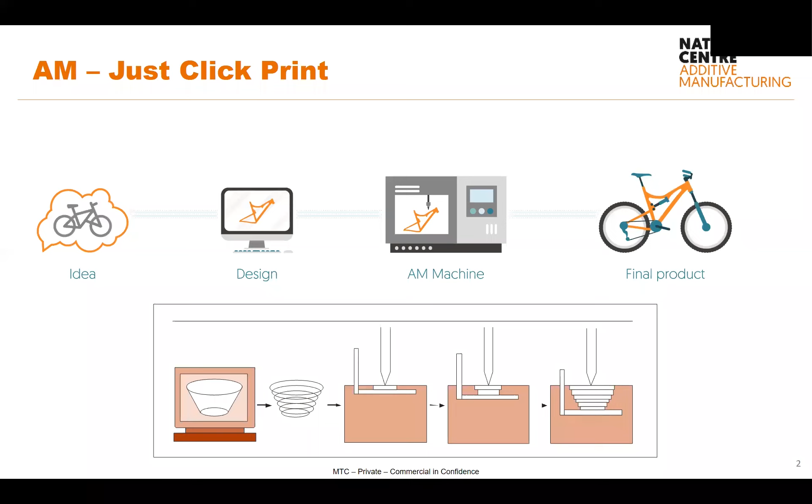So what additive manufacturing actually involves is an awful lot of steps in order to get the part right. Because we're designing parts with very complex features, we're going to need a very robust inspection plan. The harder the design, the more difficult it's going to be to inspect and validate. The part does not come out finished.

When we have a part post-AM, there's a lot of machining steps required. We've got to recover our material, remove support structures, and finish it. So there is some level of machining to do after AM. We also have to identify the appropriate melt strategies to melt the material properly and get a good microstructure free of defects. There's a lot we have to do up front around the design—it's not just the design of the part itself, but also the support structures that need to go around it.

Unfortunately, powder beds are very poor conductors, so heat builds up in the part. If we want to get rid of that heat, we need to have a sensible amount of support structure around it to take the heat away from the part, but also to appropriately anchor it. So there's a lot of considerations that need to be made at the design stage.

And then, of course, as the topic of this is powder, there are lots of considerations that we need to make when it comes to powder. You'll see a lot of these steps involve something that we have to do with our powder material. Obviously, the scope of this webinar won't cover all of this, but fortunately, over the next few weeks, MTC and the AMTC are putting on a number of webinars which will cover the whole process chain of the additive manufacturing process. Today, we're going to focus just on these powder handling steps.

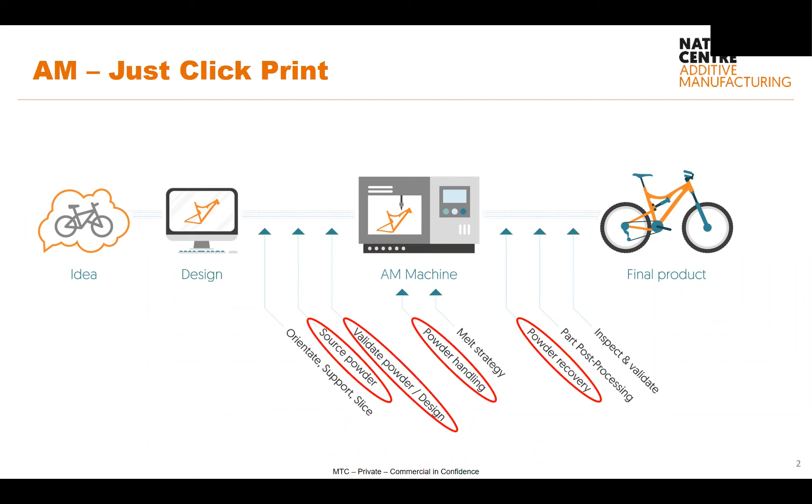So why should we care about powder in the first place? Commercially, if you think about the powder itself, we're buying an atomized material, which in itself is more expensive than buying billet material. So the material itself is very expensive. When you run the numbers on this, it can, in some scenarios, make up a third of the overall production cost just simply buying your powdered material.

Now, additive manufacturing is often billed as a material sparing technique. What that means is that we only use the material that we need in order to build our part. If you look at things like subtractive manufacturing, we can lose 20 times more material than we make into parts—a buy-to-fly ratio of 20 to 1. In AM, because we're building parts much closer to net shape, we can use a lot less material. But when you think about what additive is doing, you're spreading an entire chamber full of powder and only making a small amount of that volume into actual parts. So the ratio of powder used to part built can be just as bad as subtractive manufacturing.

So in order to hit that material sparing criteria, in order to make the business case work for AM, we have to be able to reuse the material. But every time we use it, how is the powder changing? Is it still suitable for the process? Is it still applicable to use in my next process, or do I need to throw it away? We've got to be able to understand that.

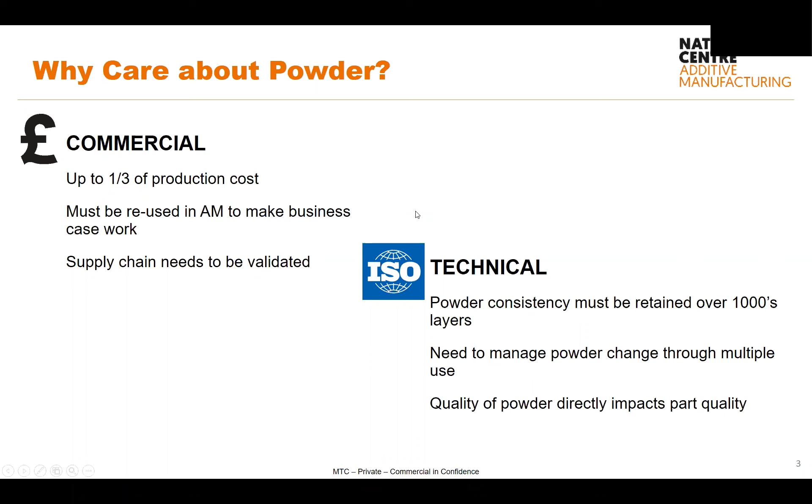Some of the things we need to be concerned about are things like contamination. Contamination is really hard to control. If we're getting bits of our machinery, for instance parts of the steel surface breaking up and coming into the material, that's going to contaminate it. If we have other materials that we're handling in the area and they cross-contaminate, that's going to contaminate our powder. That might not be suitable to reuse in process. We've got to worry about contamination.

Process incompatibilities - if the material's not appropriate for your machine or your part, you're not going to get a good process and a good part at the end of it. Health and safety, obviously, is a huge risk and something we absolutely need to be getting right. Powder part ratio, like I said, can be as bad as, if not worse than, subtractive manufacturing if we're not able to recycle powder. So we've got to make sure we know how we can do that well.

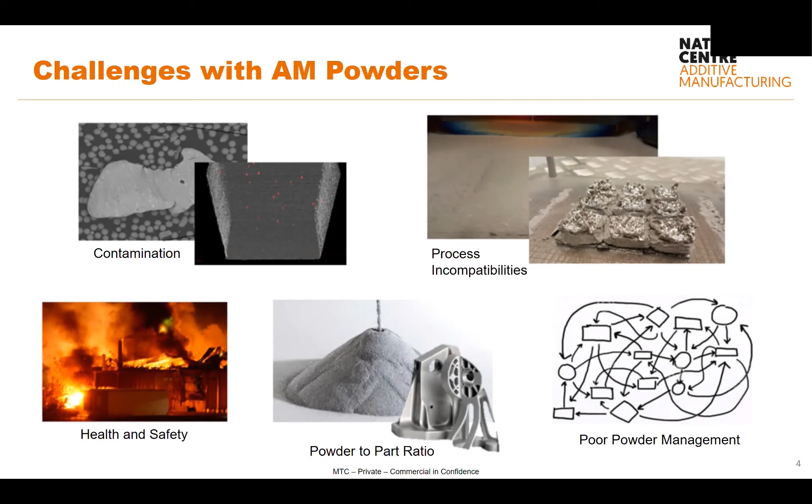And then the other thing is poor powder management. If we don't know the history of our material, then we really shouldn't be using it, because we don't know if it's still good for use, if it's been handled the right way, if it's been exposed to unfavorable conditions that might have degraded it further. If we don't know the history of this powder, that can get very complicated. If you've got a powder that's been recycled over 50 times, and multiple powders like that on site, it can get very complicated how you manage that material. And if you don't have that history, then you don't have a process. So there's lots of challenges when it comes to AM powders.

So maybe just to drive this home, if we look at a very basic overview of any process we're running, our parts are obviously going to be inherent of the material we put in and the way in which we run the process. So if we don't really know what we're putting into the machine in terms of the powder, and we run in a fixed process window, then we can't really hope to control the quality of our properties - it's going to be variable, it's going to be unknown. So what we need is a position where we have a powder which complies with an adequate powder specification. Then, when we know our powder conforms to that specification, we can run our fixed process window, and fix component properties within a tolerance.

So there's a lot of questions we need to start asking ourselves about this input material. Firstly, as I've said a few times, if I put rubbish in there, I'm going to get rubbish out. If my powder is not compatible with the process, it's not going to work. So the first thing I need to know is: how does my powder properties influence the AM process? What does a good powder for my process look like? I then need to worry about batch to batch - am I getting the same material every time I order a batch from my supplier?

And should I ever need to switch suppliers, do I understand the level of variability between one supplier to another? Do I have a good handle on that? Because I'm reusing my powder, I need to understand how the AM process affects it. Am I going to pick up oxygen, interstitial oxygen, for instance? Am I going to pick up contamination? Is my particle size going to change?

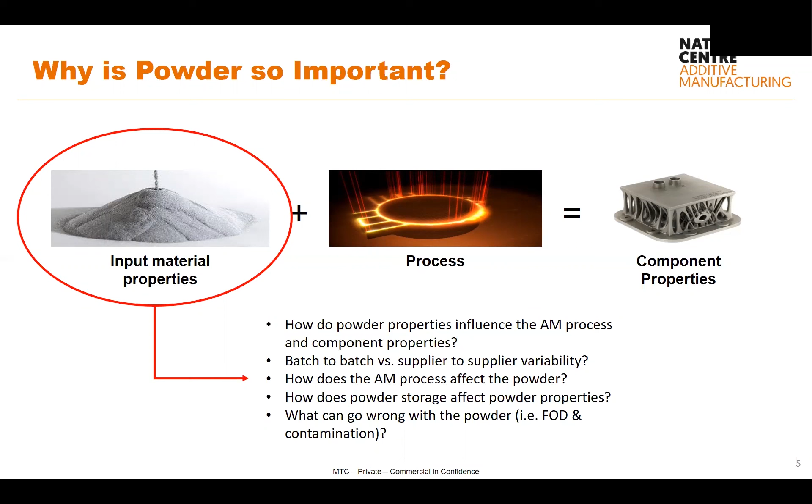And then, what can go wrong with it? FOD, so foreign object debris or contamination. What are the things that can happen to the powder whilst it's on site that are going to degrade or detract from the quality of that? And of course, in order to answer these questions appropriately, we need a robust powder management process.

So what is powder management? Effectively, we see powder management as being a framework to enable full material traceability and quality control of powder feedstocks and manufactured components. And so a good powder management process should enable us to answer these three fundamental questions.

What has happened to my powder? Where's it been? How many times has it been used? What machines has it been used in? What processes has it gone through? Has anything happened to it that may lead me to believe it's no longer in specification? Like, was it used in a machine where the oxygen content raised above a threshold, and therefore I might have some high levels of oxygen in my powder?

I want to know what's happened to my component. So the component I've made, what the powder that was used to make it, like what's the history of that, and then what's happened to my equipment. When I've used the sieving equipment, for instance, has the sieve screen broke? And I might find that out by doing a quality control check on my powders, and I can say, oh, something's happened with my equipment. I need to have a look at that.

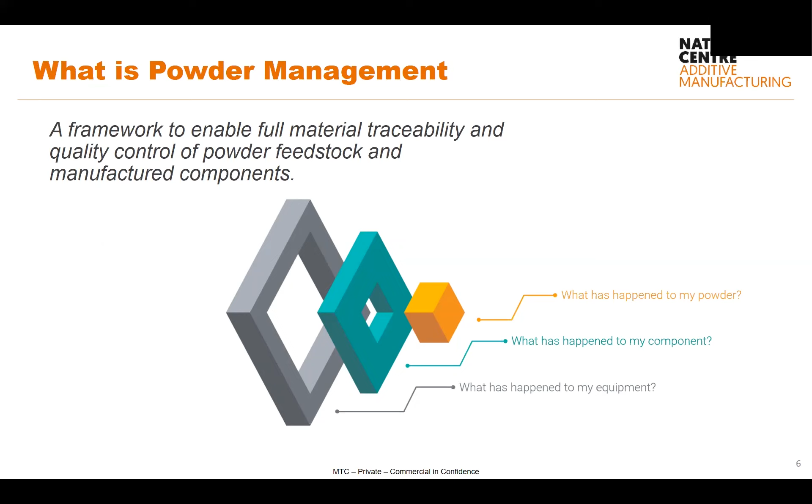And so why implement powder management? I believe it would be clear to everyone right now why we should be implementing powder management, but just maybe to drive it home, really, there's a term that's used in the aerospace industry, ALARP, as low as reasonably practicable.

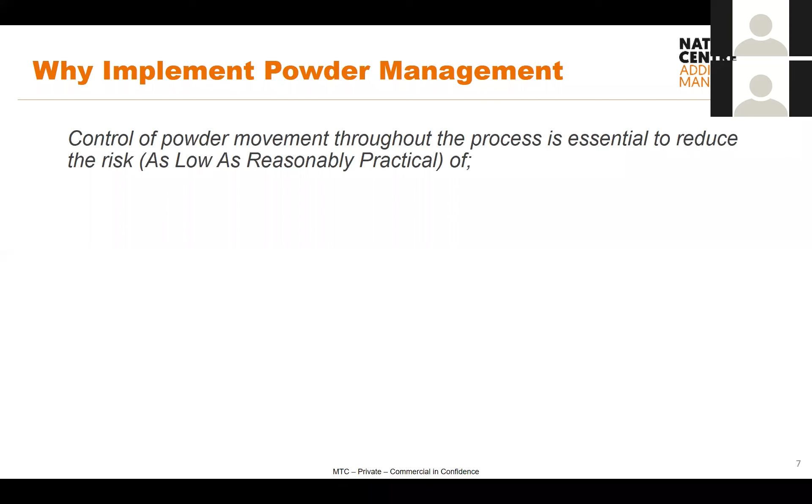Where a powder supplier was contacted by someone they've sent material to, and this user of the powder has lodged a complaint: your material that you've sent us is contaminated. Now, when they did a failure investigation to understand what happened, actually there was nothing wrong with the powder supplied by the supplier. The issue was actually with the user, because they weren't using dedicated machines, as in, they weren't using a machine dedicated to a material type.

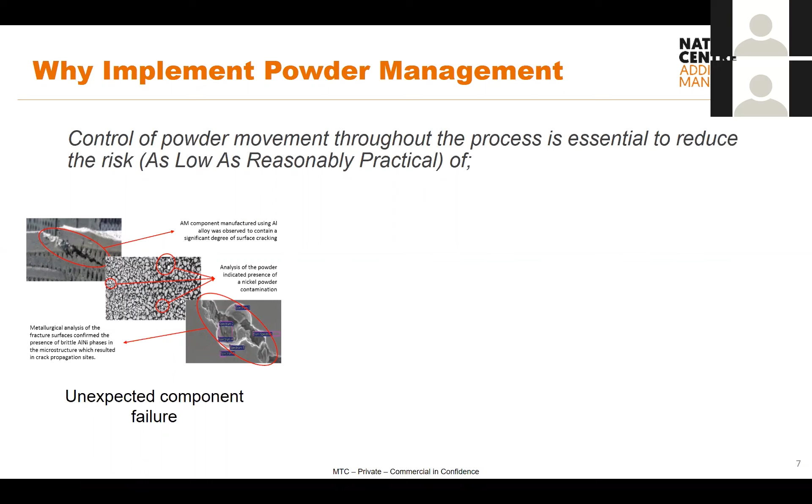They were switching materials from build to build. And what actually happened was the previous time they used that machine, they hadn't cleaned it out properly. And so when they put this new material into it, it became contaminated with the previous material. And so they ended up with some unexpected component failure. And that's really important that we've got to be able to minimize that as much as possible.

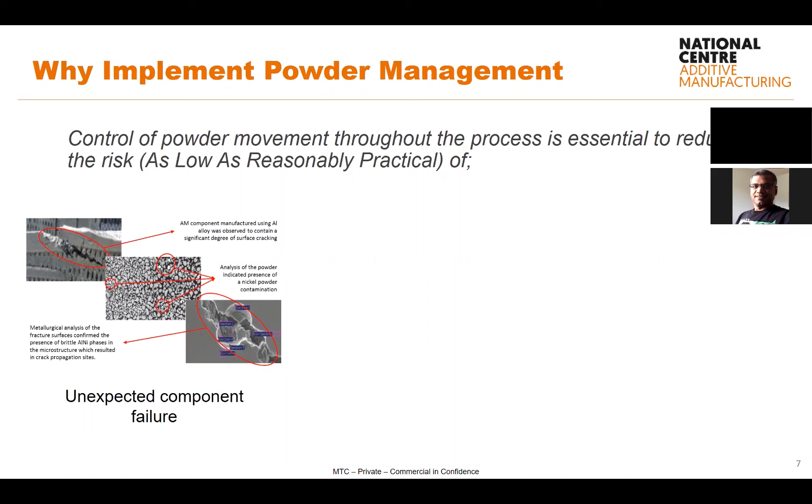The other one, it happens. Human operators at the end of the day run these machines. Material misidentification. It's about understanding, making sure or minimizing the risk as low as reasonably practical of putting the wrong material into the wrong machine or the wrong process.

And then the other one is this concept of lack of traceability. As long as I have good document processes and I keep track of what I'm doing with my powder, I can be reasonably confident that I have a good level of traceability of that material, and I know how it's been used and what might have gone wrong with it.

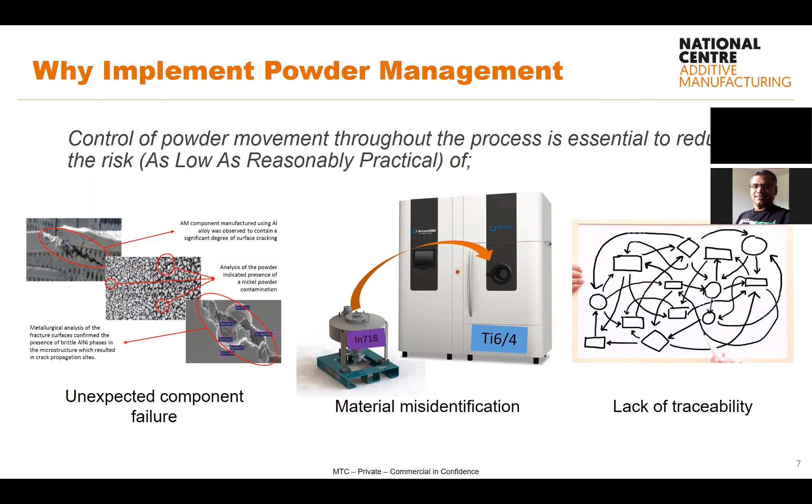And so what the powder management cycle looks like. This is what we implement at the MTC. And again, with the time that we have available, there's not enough time to go through all of this. But step by step, we need to validate our material.

We need to receipt the powder. Now this is very basic, powder receipting, but it's so important. It wouldn't be the first time that we've ordered material from a supplier and that material has been the wrong material, for instance, that's happened to us before. It might have the right labeling, but the wrong material inside the container.

It might arrive in a damaged container. If the container is damaged, how do I know the powder inside is going to be good? For instance, it may have been exposed to elevated humidity and temperature, and therefore the powder inside may have degraded.

So powder receipting becomes very important. Did I get what I ordered? Did I get it in good condition? And did I get the amount that I ordered it in? Quality assurance, again, is so important.

But the reason quality assurance becomes so important, it's not just about when I first order the powder and first receive it, it's about when I use it afterwards. The powder supplier only needs to get it right once, but as an end user of AM powders, I need to be able to get it right 10, 20, 50 times, however many times I'm going to use it.

Powder storage and segregation, again, it's about reducing that risk as low as possible, having dedicated areas for certain material types, having the appropriate storage conditions, whether that's humidity and temperature controlled, whether that's ambient conditions.

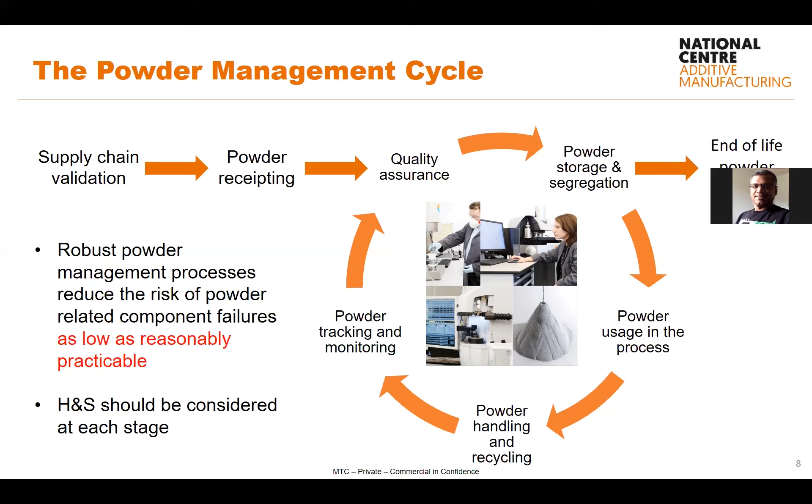So supply chain validation. Now, one of the things I always like to preach about AM powders and the supply chain is that the powders come in many shapes and sizes, depending on the process used to make the powder. And in most cases, even if the same process is used, depending on the supplier of that powder, I will get either very or subtly different powder properties.

And that's going to affect things like bulk packing, flow properties, and effectively the way it works in the process. Now, there's not enough time to talk about all the different atomization processes here, but it's really important that you understand what is the right atomization process for my material.

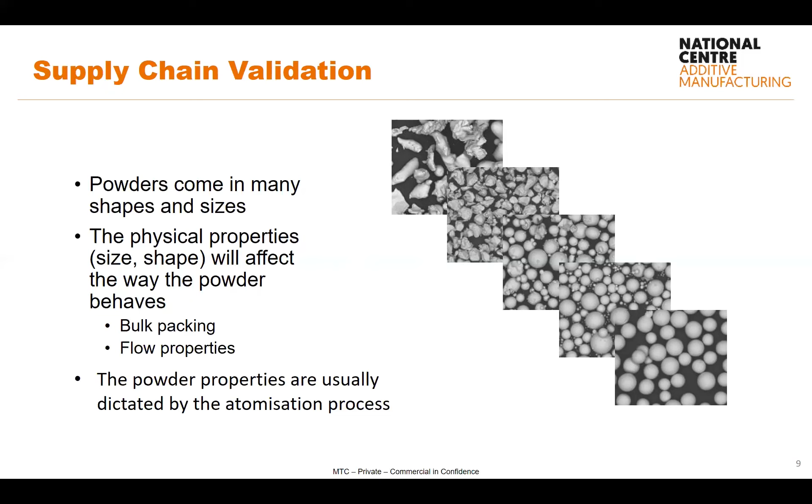So some of the very pertinent things you need to consider: am I using a nickel superalloy, for instance? If I am, I probably want a powder that's been atomized via argon rather than nitrogen. If I'm using titanium, I probably want to go to a supplier that uses EIGA, electrode induction gas atomization, rather than a supplier that's going to use a crucible.

So there's lots of things that we need to consider. We need to understand the supply chain and how it affects our material.

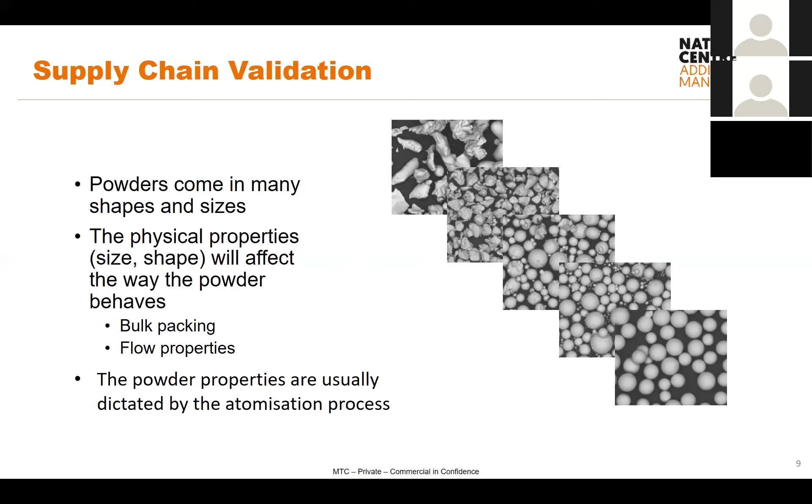Now, when we look at the actual AM process, how is powder handled in the process? Well, there are 4 things during the actual process that we need our powder to do. So the first one is storage. Clearly, at some stage, we need to put powder into a machine. And of course, anyone that's run an AM process will know they're not exactly fast. It could take days, 3 to 5 days to complete a build from start to finish.

So during that time, we need to make sure that powder is stable. We need to make sure there's enough of it to start with. So is the bulk density sufficient that we can pack enough material into this hopper to get through the whole build? Is there going to be any change, like particle size distribution? Is there going to be any segregation in that hopper during that time?

Is there going to be any time consolidation, which may mean that whilst I get good dosing to start with, it degrades over those 5 days? There's a lot of things that we need to consider effectively.

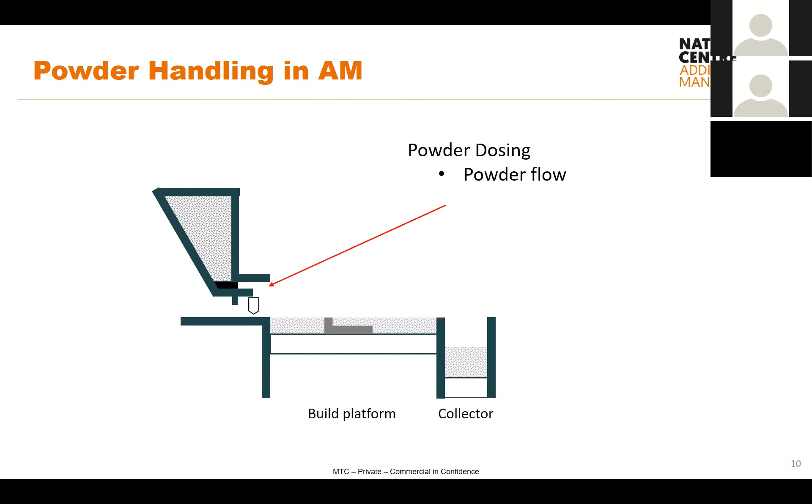At some stage from that storage, we need to dose our powder into our machine. We need that to be consistent every time, dosing the right amount, with a consistent particle size distribution and no segregation. And it has to be equal across the face of our spreading device. So very different behavior to static now; we need to go from this static condition in a hopper into a flow condition.

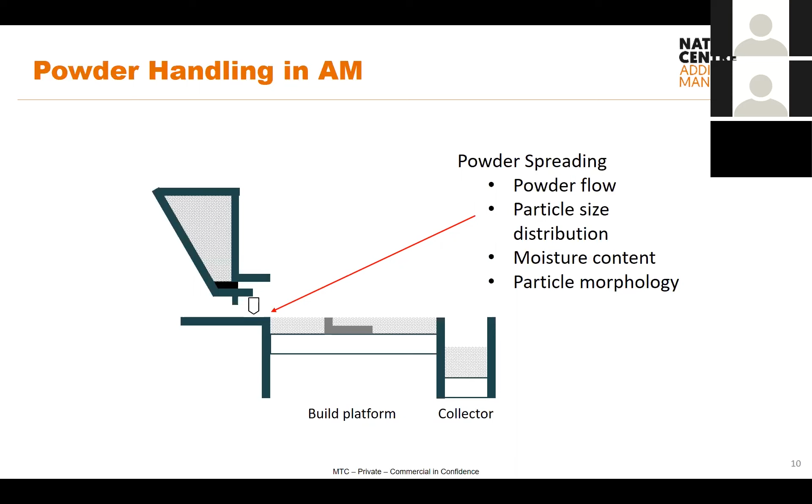At some stage, after we've dosed it, we need to spread it across the bed. Again, flow becomes really important, size distribution important, morphology starts to have an effect on things like flow. Effectively what we're trying to do is have a very even coating of powder across this build platform, and we need to do that every time, thousands of times. So again, very different behavior that we need from our powder compared to dosing or storing it in a hopper. And then eventually we want to melt that into a part.

And that's where things like chemistry are going to become important. Is the chemistry correct? Is it clean? What I mean by clean is it free of interstitial contamination, such as oxygen, for instance, or at least within the right spec, or is it free of foreign particulates?

And then we might be worried about porosity. Is there porosity within the particle that when it melts might cause issues? And again, bulk density. So when I've spread it, have I got a consistent bulk density? Is it dense enough that I get good stability of the part and I don't get too much shrinkage when it melts, for example? So lots and lots of different things that we want our powder to do.

And this is just inside the machine. This is before we even consider how we get the powder into the machine and out of it, and all of the equipment we have to handle it through in order to recycle it. So we demand a lot of the powder in terms of performance.

And if at any stage this goes wrong, it could be as simple as my powder doesn't dose. And that happens. I've seen many examples where we've put a powder into a machine and it doesn't dose. In that case, that's in effect a catastrophic failure, right? The machine just isn't going to be able to build.

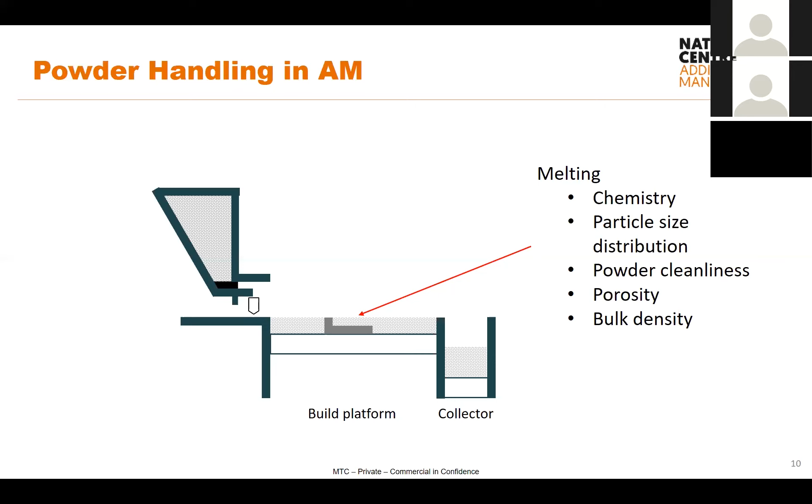And these are things that happen. So we've got to make sure that we understand how our powder, what powder we need in order to do all of these things efficiently. And so how do we do that? Well, unfortunately, powders are quite complex, and there are a lot of things that we need to measure.

So we tend to talk about four levels. So you've got our particulate properties. This is things like particle size and its distribution, particle shape, internal porosity, and of course the metallurgy.

Then those particles obviously are going to form an assembly, a bulk. So then we're worried about how those behave in that assembly. So packing becomes important. How do they pack under a loosely poured condition? How do they pack under a tapped, stress-induced condition? How do they flow? How do they flow out of hoppers? How do they flow in the spreading device, for instance? These are all things we start to worry about.

Then, of course, there's the chemistry. I always like to say, no matter how good a material flows or how good the morphology is, we're never going to choose a material unless it has the right chemistry. So that's fundamentally the most important thing. Is the chemistry correct in terms of its alloy composition, but also in terms of the interstitial elements like oxygen and nitrogen that obviously will have an effect on mechanical properties.

And then there's cleanliness, which is a lot harder to identify. There are no standardized techniques for this, but it's important nonetheless to understand, is our material clean, or is there something in there which, if it forms the final part, is going to be detrimental?

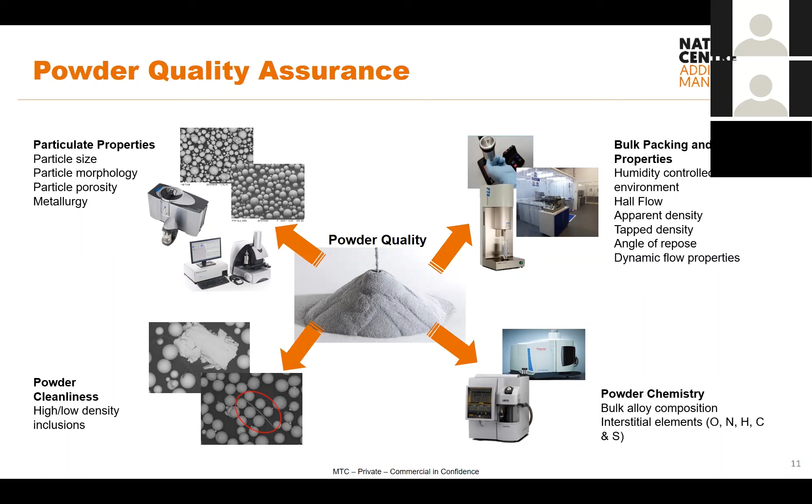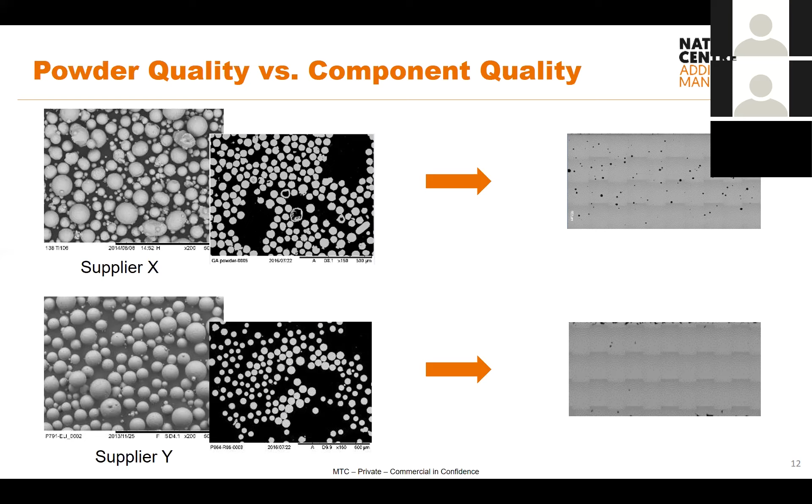So on to powder reuse then. Why is this so important? In the process, there are several things that we want to be concerned about.

The first one is a phenomenon known as spatter, weld spatter. I already mentioned that powder beds themselves are very poor conductors of heat. So what this means is that when we melt the powder particles during the process, because we're not releasing that heat from the melt pool, the melt pool can exceed the boiling point of the material. And if that happens, we get particles ejected from this melt pool - you can see them, they look like mini firework displays if you ever watch an SLM, a laser melting process in operation. Of course, what these particles are, they're molten, so they're very, very hot. So any residual oxygen in that container, those particles are going to pick them up.

But also, in a similar way to the atomization process, those molten droplets, if they come in contact with anything such as a surface or other metallic particles, they're going to have deformed geometries when they freeze, when they reharden. And if those are too small to be taken out by the sieve, then those irregular particles will then be present in your powder after you've recycled it. So you're going to have potentially bad morphology and locally high oxygen content in these particles - that's bad news for your recycled material.

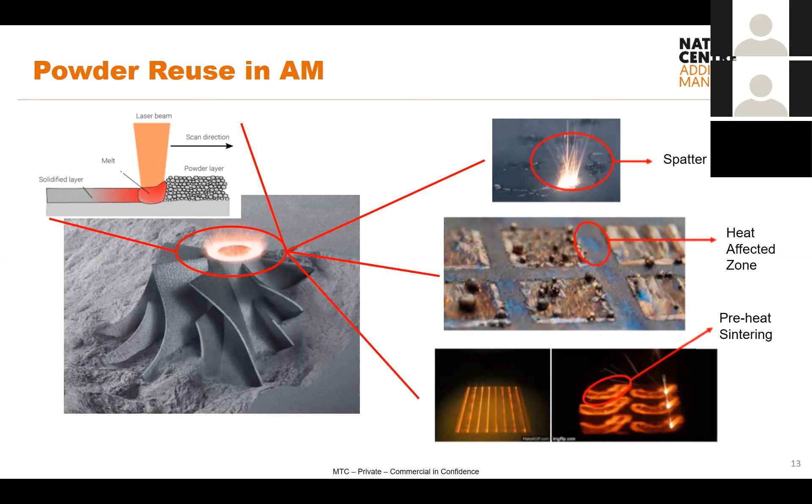Now, the third one - and if you're not familiar with electron beam melting as a technique, you won't have come across this - is preheat sintering. In electron beam melting, for all sorts of reasons, we have to pre-sinter the material in order to avoid something called the smoke, effectively where charge builds up in your particles and they basically repel one another, and you get a big puff of smoke, of powder particles flying up into the air.

Down the system, it's bad news, so you have to sinter. But of course, sintering is a soft melting - you're not fully melting the particles, but heating them up sufficiently that they form necks and sinter with adjacent particles. Because the sinter area in EBM tends to be quite large relative to the part, coming back to that whole process economics, you've got to be able to reuse that pre-heat sintered powder. So you break it down as part of the recovery process back into its individual powder particles, which then get put back into the machine.

Now, again, because you pre-sintered, there's a chance of raised temperature, therefore higher oxygen content in the particles locally, and potentially a morphology distortion - so you're degrading the morphology of your particles. These very nice spherical particles are no longer as spherical. Is that going to affect the way they flow and pack in further builds?

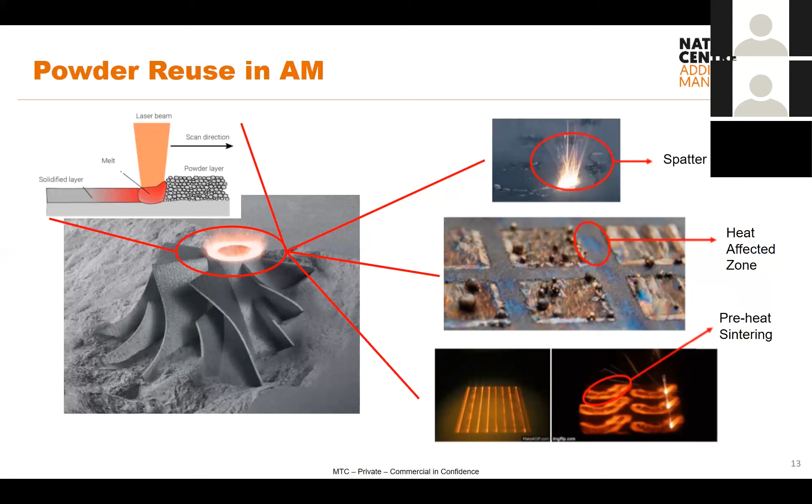So when we look at powder degradation, some of the things I think we need to be most concerned about - there's two of them. The first one is interstitial contamination.

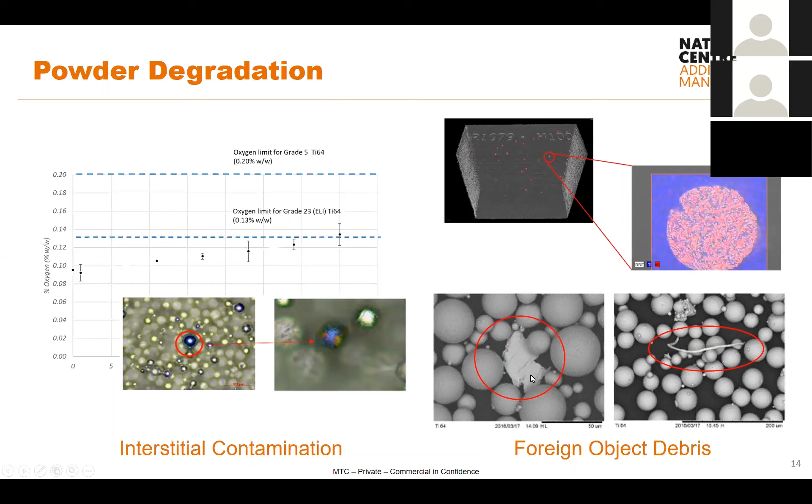So how do we do powder recycling then, and what are the challenges of that? We've got a machine, and at the end of a build, we're going to have some remaining powder in our hopper that we loaded to start with. We're going to have the unmelted powder in the build platform, and then depending on what machine we're using, we're probably going to have some overflow container which has powder in it as well. We need to be able to recover powder from all of these places.

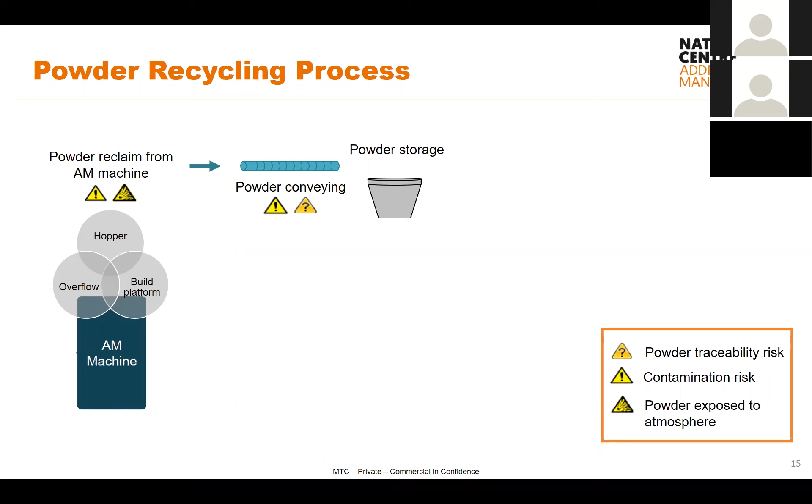The first thing we're going to do is convey the material from the process, from all three separate areas of the machine. We're going to put it into storage, then convey it to a sieve where, again depending on the process we're running, we might have a single sieve deck and only cut out the oversize, or we might have a double sieve deck where we cut out both the oversize and undersize, and keep the bit in the middle.

Then at some stage, we're going to bring that back to storage. We might take a sample at that point to do some quality assurance testing, and then we're going to load it back into the machine.

Now, again, this is a bit divisive in the industry, so I've not included it in this graphic. We may also blend the powder at some stage, just to homogenize it and mix in some new material. But the point is, at each of these stages, if I'm not careful, I have the ability to contaminate the material. I have the ability to expose my powder to atmosphere, and I have a risk to traceability.

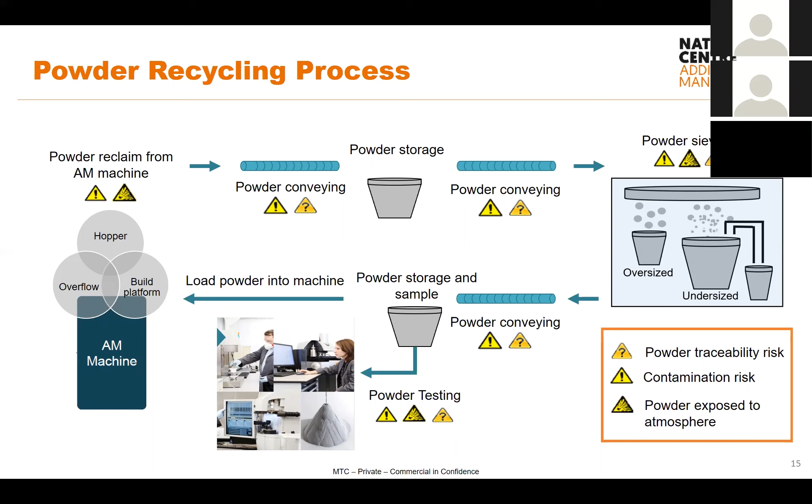So I need to be able to manage all of these. Now, the equipment that we use in recycling - there's lots of hoppers, obviously. There's a hopper in the machine itself, and usually when I decant from machines or from one process to another, I'm going to put it into a hopper. We've already talked about the potential issues with flow there. So the challenge with the equipment is, will I get good flow of material out of those hoppers?

I obviously need sieves. Again, lots of challenges with sieves. Am I going to blind my sieve? If my sieves are likely to blind, what can I do about that? What kind of sieving technology do I need in order to get the most appropriate sieving?

At some stage I might need blending units. Again, blending is a whole science in its own right. Worst case scenario is you may as well have not blended in the first place, because actually by blending inappropriately, you can segregate particles. So you might end up with a really particle-size-segregated material.

Think about your cornflake box. When you've got your fines, they all sift to the bottom and large sits on the top. So if I blend inappropriately, I could cause that to happen. How is that then going to affect future uses of this material?

And then with some of the newer machines that are coming available, there's actually a lot of pneumatic conveying. What's that going to do to my material? Is that going to degrade my material? Is it going to cause any breakdown of the material itself? Unlikely, because it's hard metal powders, but there's a good chance I could cause breakdown of the transfer lines, and therefore degrade my material by putting in contamination.

So there's lots of equipment that we use. And again, we need to understand what is the right equipment for my process and for my powder. So it's not just as simple as, I want that one.

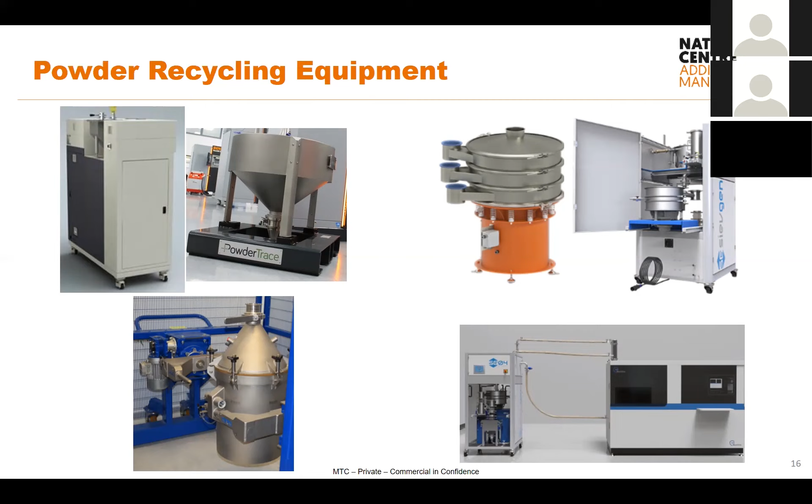So powder storage - at some stage you're going to have to store it. And I guess what we're interested in here is, what is the way to store material? So I might want to worry about the actual gas that's in contact with the powder. I obviously put my powder in a container - what's the gas around it? Does it need to be inert? Is it okay to just be ambient? Do I need to add desiccants to try and remove moisture from the immediate area? So again, this is the internal environment that the powder is stored in.

Then there's the container itself. Is it okay to use plastic jars, which a lot of powder suppliers use, or do I need metal? What's the right container for my material? And then there's the external environment in which we store that container. Is it okay under ambient conditions, or does it need high level control, such as humidity, temperature control, or even one step further, inert gas control? These are the questions that we need to understand.

And again, there's not a one size fits all. It fundamentally depends on the material that you're using and the level of criticality of the part you're trying to build.

There's not a one size fits all here. The most important thing is it has to be cost effective — the minimum requirement to maintain powder quality whilst costing the least amount of money. It's not appropriate to apply the highest level of control over storage in every situation, because at some stage it just might be cost prohibitive. So again, we've got to understand the right way to store our material.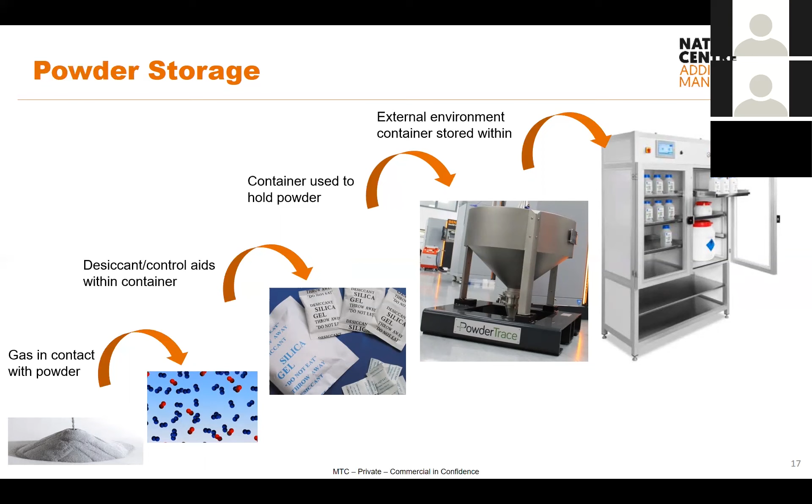So the last thing I want to cover is a bit on health and safety. Health and safety is a bit of a minefield when it comes to metal powders, simply because there probably isn't enough data working with them. I just want to give you a real example, which you can read up on the internet.

It comes from the medical sector. An employee was using a vacuum to clean up a spillage of titanium powder. The vacuum this employee was using was inappropriate for the job — it wasn't grounded properly, and therefore it was able to build up static charge. That static charge was enough to ignite a dust cloud of titanium 6-4, which led to severe injury of the operator in question.

In this scenario you could say they were lucky — one person getting injured is clearly not ideal. But when it comes to explosions like that, sometimes it's not the primary explosion that's the worst thing, it's often the secondary explosion. If you get one explosion and there's any dust around your facility that hasn't been cleaned well, that can get de-settled and cause a secondary explosion, which can be much worse because there can be a lot of it.

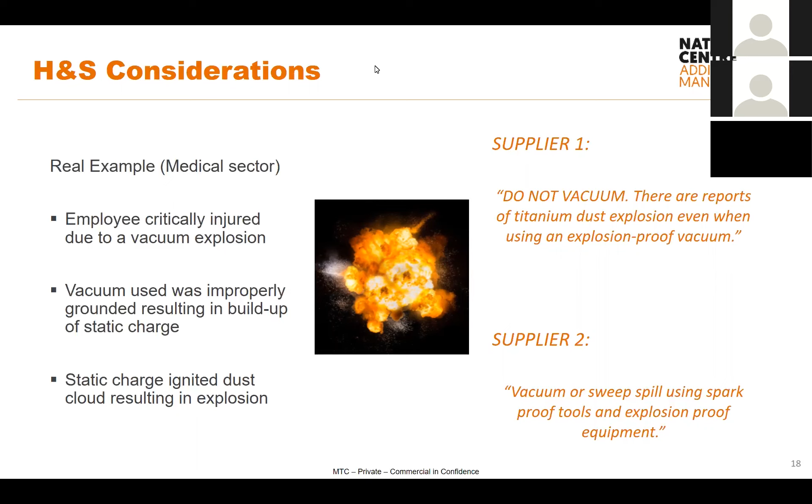So something we did at the MTC — I'll go over this case study quickly now. We worked with the Health and Safety Executive, part of the Health and Safety Laboratory, and we looked across a number of different AM processing sites to assess the level of exposure our employees face. Explosivity is one issue, but another is that a lot of the materials we work with, such as nickel, are potentially carcinogenic, so we've got to protect our operatives.

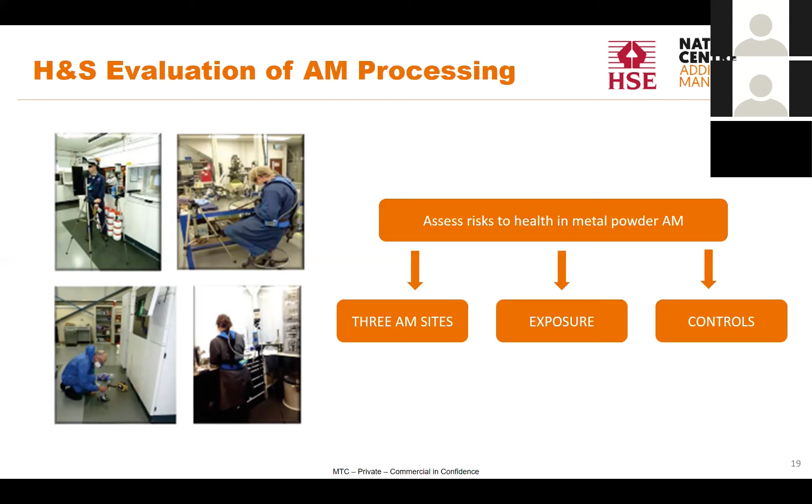The HSE came into these three sites and we put various testing equipment around the lab — sticky tabs at different locations for different activities. The operatives had personal monitors close to their mouth and close to where their respiratory equipment would pull air from if they were wearing belts, so we could get an indication of particle exposure at those locations. We also did personal monitoring, testing the operatives' urine to see if they had elevated levels of materials used in AM. These are the results for the three sites.

Now the good news story: at none of the sites was there a higher level of occupational exposure than specified in the MSDSs — no operative was exposed to a level of material higher than it should be. But what we did find was that the level of airborne particles depends on the task the operative is carrying out.

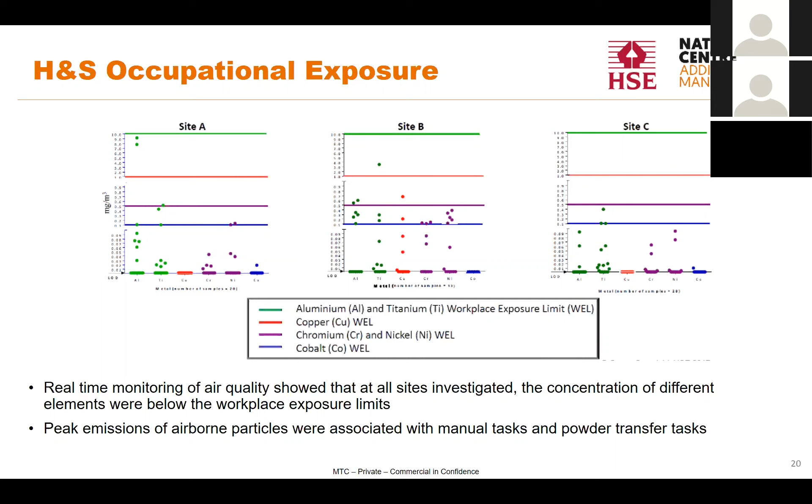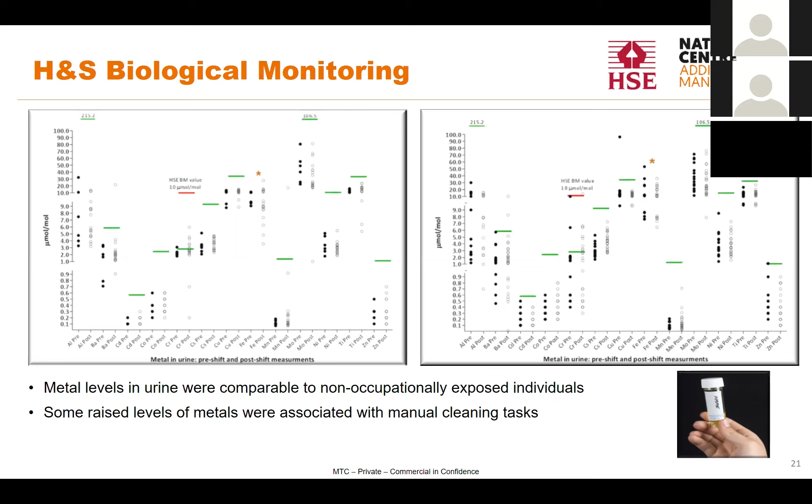The worst tasks were those involving manual handling of the powder material itself — whether decanting from one piece of equipment to another, sampling for the lab, or doing lab techniques. Wherever you are manually handling powder, there is a chance you can create airborne powder particles. The other good news was that in biological monitoring, none of the operatives had a level higher than what is considered safe, though some had raised levels compared to the general populace. So we can say we're doing a good job when it comes to health and safety — the level of PPE we use is good, even if we are overly reliant on it.

Some of the endeavors that equipment manufacturers are doing, they're trying to develop more sealed units, sealing the powder away within the machine so that transfer is more automated rather than manual. But I think there's still more that needs to be done in this area, both from users and from equipment suppliers.

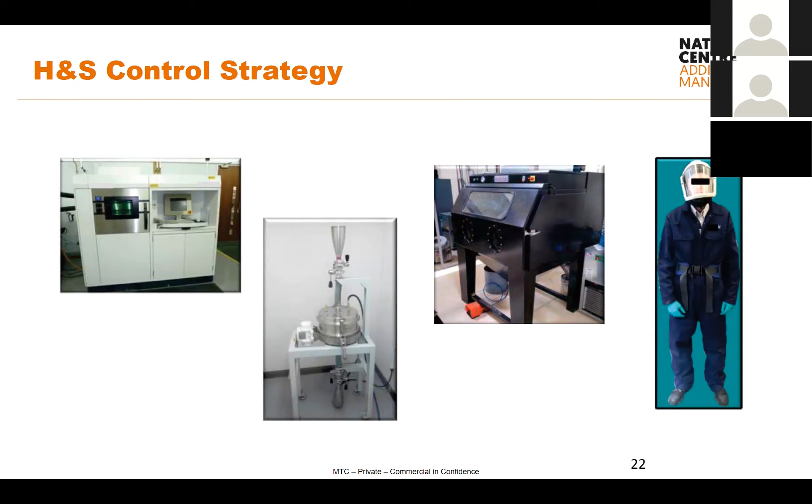So it brings us nicely to the end of the presentation. Just to conclude, maybe some of the salient points I've tried to get across: powder management is an essential activity, and I hope you can now understand why. If you missed it, the three things I think powder management is essential for are unexpected component failure, material misidentification, and lack of traceability.

All powders are not made equal. I can go to 5 powder suppliers and get material of the same chemistry, all hitting a chemistry spec, but that doesn't mean everything else about those materials will be the same. It doesn't mean the starting level of oxygen will be the same - some might be low, some might be high. It doesn't mean the morphology, size, or flow will be the same. Therefore, I can't expect any material that fits a chemistry spec to also work the way I expect it to in a process. It's more involved than that.

Powder recycling, of course, is essential. If I want my AM process to work economically, I have to be able to recycle the powder. I can't buy this expensive material and throw it away after one use - I've got to recycle it. So I've got to be able to manage that process, and I need to be able to optimize it.

And of course, health and safety - I hope this should be clear to everyone anyway - health and safety in metal powders absolutely needs to be fully understood and controlled to prevent injury to personnel, but also to prevent destruction of property or equipment. I think this is an area that the whole industry needs to come together and work on to solve, because at the moment it's not consistent across suppliers.

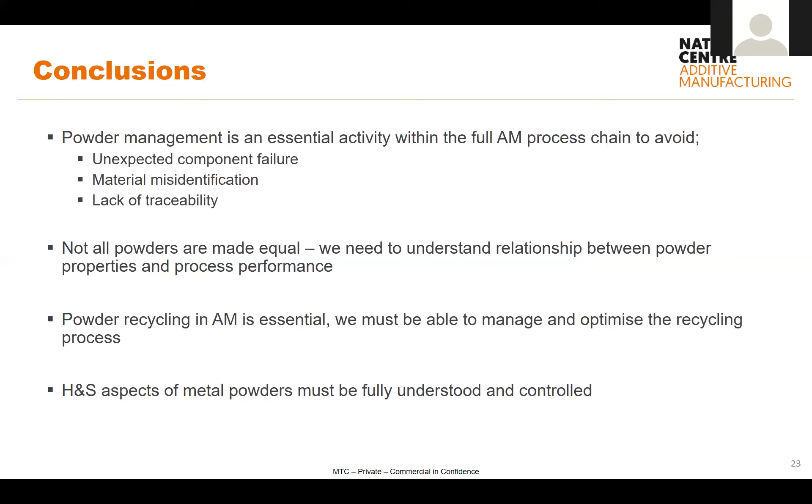Thank you, Jason. I hope you found that topic rather interesting. It was good to point out throughout the presentation the importance of understanding the powder management process and also how to handle powders appropriately.

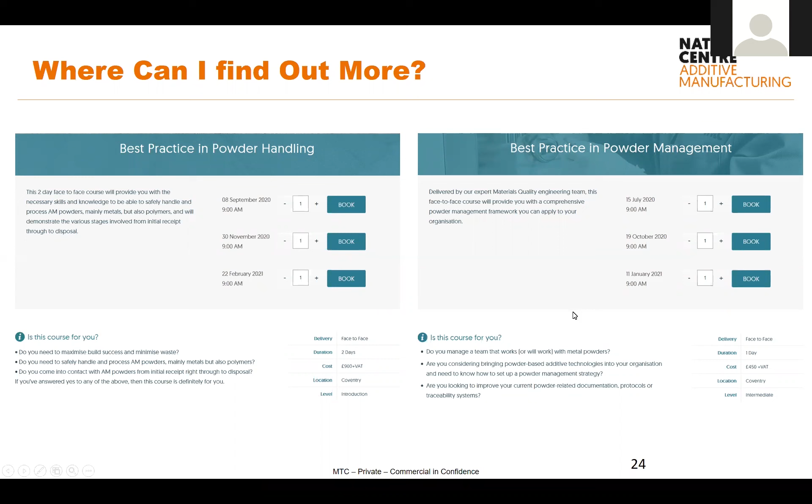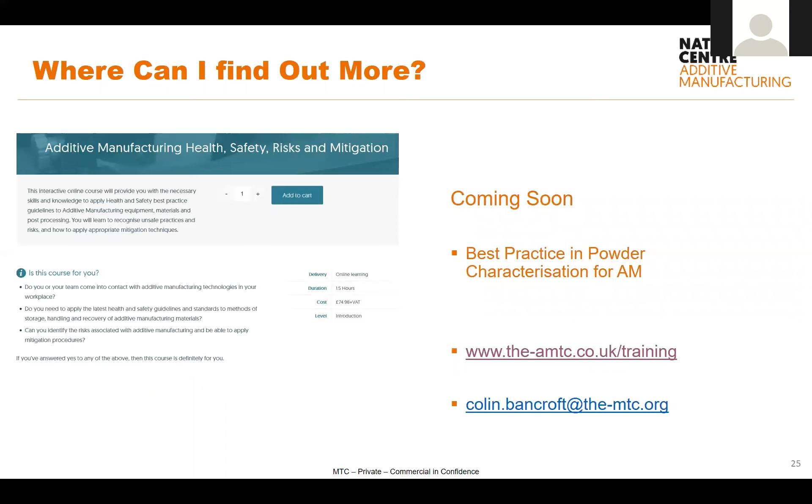What I'd like to do now is go through some of the questions that have come in, and I hope Jason's on hand to answer some of these questions.

So one of the first questions that's come in is from Ina, and it's for you, Jason: are the measurements of the powder degradation published anywhere?

There are a number of white papers out there, yes. There are some conference proceedings that we would have written up ourselves, and that work I presented on was done in collaboration with Renishaw. Renishaw will have white paper notes on their website, I believe, that's available. And there are other studies that have been published elsewhere.

If anyone's particularly interested in getting hold of those, I guess we can probably share them, can we? I mean, they're freely available, public domain, Colin.

Okay, and then we had some questions that came in prior to the webinar taking place as well today. Again, one for you, Jason: how do we know when a powder reaches the end of its usable life? Yeah, okay, it's a good question.

Generally speaking, what we would want is up front to have a specification for our material. The reasons I usually see for a powder coming out of spec would be something like interstitial oxygen going above that level. So like we discussed on the recycling case study, when we use a titanium material, oxygen content does increase over time, probably more due to events such as spatter and heat affected zone rather than general pickup from ambient conditions. But once that oxygen gets too high, that's certainly time to put the powder away, stop using it.